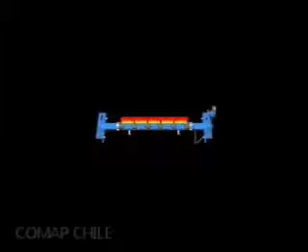Our products are patented in more than 20 countries, and their success is based on sound engineering principles. The DirtWhacker primary and secondary belt cleaner systems provide solutions to many of the problems that have plagued the industry for a long time.

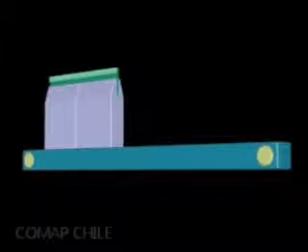A widespread problem experienced by the bulk handling industry is the effective adjustment of the conventional scraper. The conventional scraper is mounted on a solid carrier, which in turn is kept in place with mounting brackets. To compensate for wear on the scraper blades, the solid carrier needs to be adjusted towards the belt.

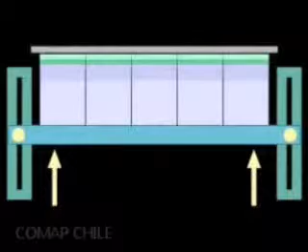This operation requires skilled labor, as incorrect adjustment can cause accelerated top cover wear or excessive spillage. Incorrect adjustment leads to accelerated belt wear and excessive spillage.

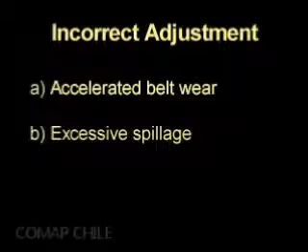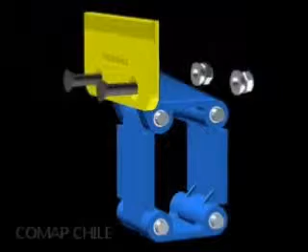The DirtWhacker belt cleaner blades are individually mounted on a parallelogram, which in turn is mounted on a main frame. The main frame's position is determined during the initial installation, and there is no need for further adjustment to the main frame.

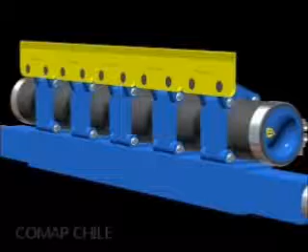To compensate for wear on the cleaner blades, the DirtWhacker makes use of a single air bladder that services all parallelograms on a given belt cleaner. As the air bladder is pressurized, it exerts force on the inner walls of the parallelogram, thereby providing a precise controllable belt-to-blade pressure.

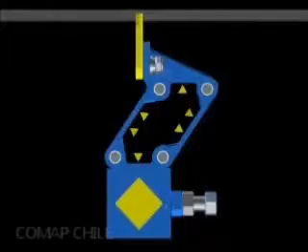From a convenient location, the pressure in the air bladder can be monitored and maintained as blade wear occurs. No skilled labor is required to maintain optimal belt cleaning with the DirtWhacker.

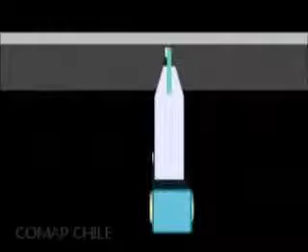Blade angle of the conventional scraper. Maintaining the correct blade-to-belt angle is imperative if excessive spillage is to be avoided. The conventional scraper blade arrangement is susceptible to friction that occurs between the conveyor belt and the blade.

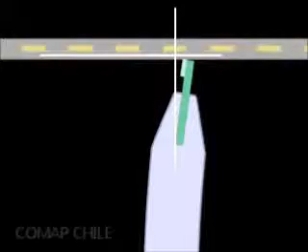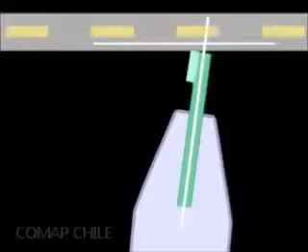The belt-to-blade friction forces the blade into a negative belt-to-blade angle. The kinetic energy inherent in the velocity of the material forces the scraper blade further into a negative angle. A negative belt-to-blade angle acts as a conduit, and material is forced past the blade.

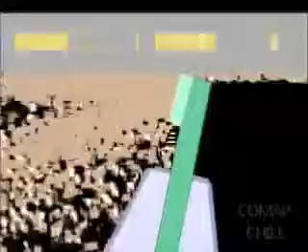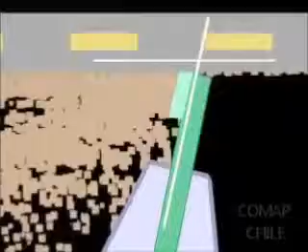To reduce the spillage that is occurring, the conventional scraper unit is readjusted towards the conveyor belt. When the material is removed, the conventional scraper blade will be forced into the top cover of the conveyor belt. Thus, accelerated top cover wear will occur.

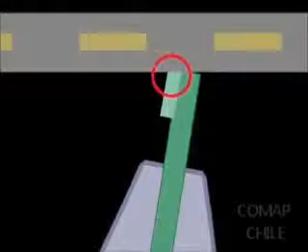Incorrect blade-to-belt angle leads to excessive spillage and belt top cover wear.

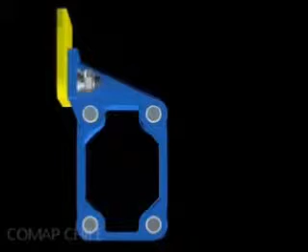The DirtWhacker principle of operation is based on a parallelogram. The durable construction of the parallelogram ensures that the belt-to-blade angle, determined during installation, will be maintained throughout the life of the blade.

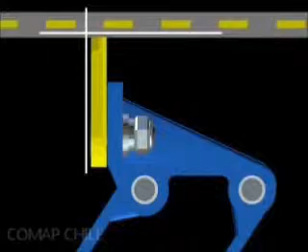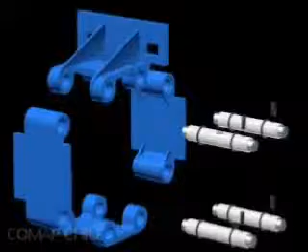The construction of the DirtWhacker parallelogram ensures an extended service life. The nylon-coated hinge pins are sealed off from the harsh operating environment with O-rings. This construction facilitates trouble-free maintenance, and the blade-to-belt angle, as determined during installation, will be maintained throughout the life of the blade.

Blade wear of the conventional scraper. Due to the loading pattern on conveyor belts, the abrasive material tends to settle towards the middle of the belt.

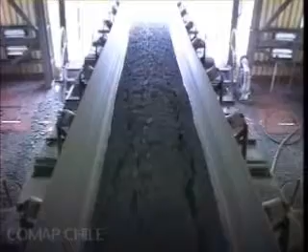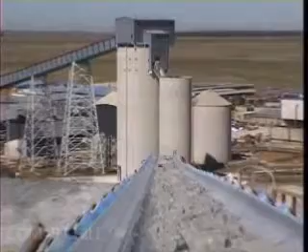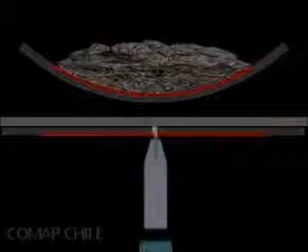Over a period of time, the impact of the bulk material causes an array of indents on the top cover of the conveyor belt. The location of the indents reflects the loading pattern. These indents act as receptacles for the abrasive carryover material.

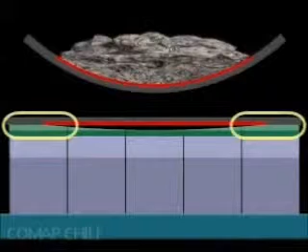Accelerated wear occurs as the carryover material passes over the conventional scraper blade. As abrasive material settles towards the middle of the belt, the scraper wear will be a mirror image of the loading pattern. When the conventional scraper assembly is adjusted to compensate for wear in the middle section,

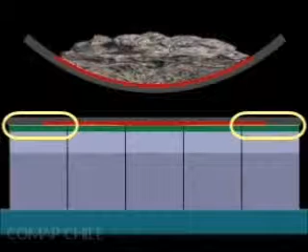the outer sections of the conveyor belt will be overpressurized. This results in accelerated top cover wear. Carryover leads to accelerated blade wear and belt top cover wear.

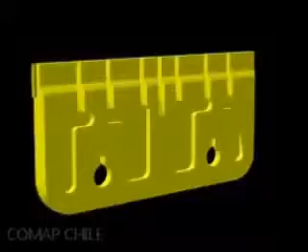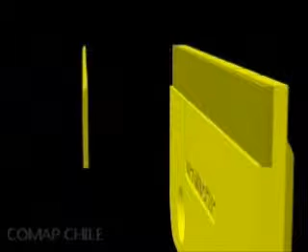The DirtWhacker blade system is engineered to significantly reduce blade and conveyor belt top cover wear. The thermal grooves minimize thermal stress on the blade and hard metal insert. The soft metal insert protects the hard metal insert from mechanical and thermal shock.

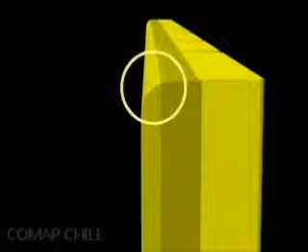DirtWhacker blades provide a wear life of 15 mm hard metal. Utilizing a rounded leading edge, the DirtWhacker blade system can be applied to the conveyor belt at a greater force than the conventional scraper, making use of the inherent flexible properties of the conveyor belt.

All materials, including those lodged in the indents of the top cover, will be squeezed out of the belt, and a clean belt will then be conveyed over the hard metal insert of the DirtWhacker blade.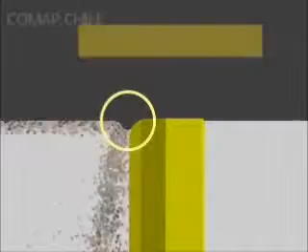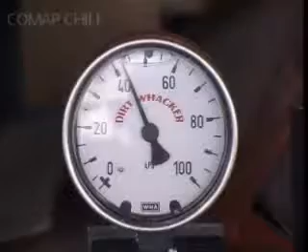If the indents into the top cover are 20 micron or less, and the correct belt-to-blade pressure is maintained, the wear on the hard metal of the blade will depend only on the conveyor belt speed and the presence of mechanical fasteners, and not on the abrasiveness of the transported material.

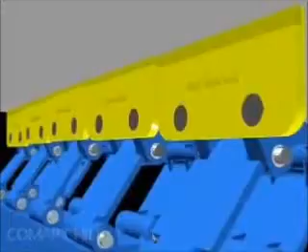Each parallelogram unit compensates for blade wear. As a single air bladder supports all parallelogram units on a given scraper, the belt-to-blade pressure of all the individual blades remains equal in spite of wear.

Each parallelogram unit is able to respond speedily to load-varying conditions. The DirtWhacker blade system does away with carryover. The single air bladder ensures uniform belt-to-blade pressure.

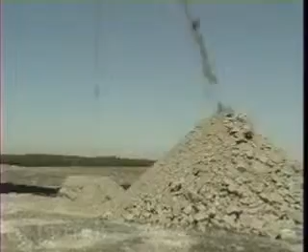No skilled labor is needed to keep the DirtWhacker functioning optimally. Only the air bladder pressure needs to be maintained as determined during the initial commissioning of the DirtWhacker cleaner.

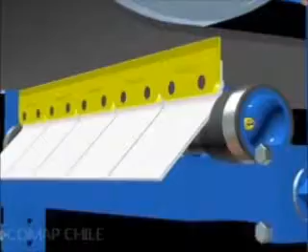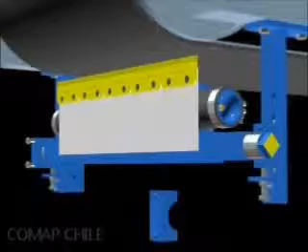Blade height must be verified at regular intervals. The abrasiveness of the bulk material will determine this interval. Replacing the blades is a cost-effective operation of removing the unit by undoing 4 bolts. By making use of the blade alignment tool, the blades are aligned with ease.

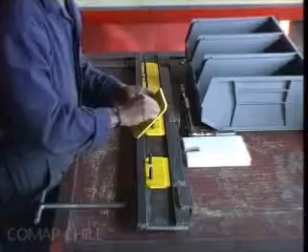Installation of the DirtWhacker belt cleaner is explained on the DirtWhacker CD-ROM by means of video and printable material.

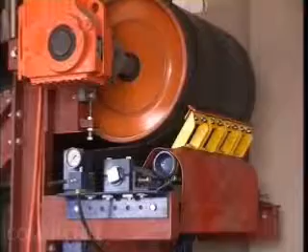As the belt-to-blade force of the DirtWhacker primary and secondary cleaners is controlled by air pressure, the DirtWhacker belt cleaner units can be remotely monitored and activated as needed.

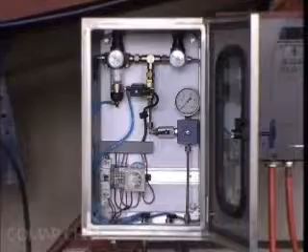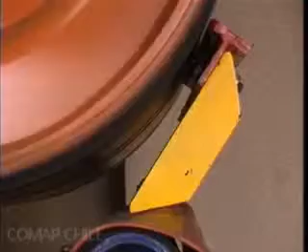The DirtWhacker control units allow for the seamless integration of the DirtWhacker cleaners with the conveyor plant PLC system. As a result, the activation and full or partial deactivation of the DirtWhacker cleaners can be fully automated.

This feature allows for problem-free operation on fast, dry-running belts. Belt top cover wear is significantly reduced if the belt cleaner is not active when the conveyor belt is running dry.

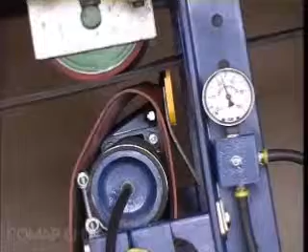The DirtWhacker cleaners can accommodate reversible conveyor belts. The DirtWhacker primary and secondary cleaners function well on most mechanically joined belts.

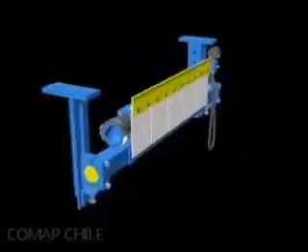The DirtWhacker product range is successfully deployed on conveyor belts with speeds of up to 6.7 meters per second. The unique technology of the DirtWhacker makes efficient belt cleaning available to the industry, with conveyor belts of up to 4 meters wide.

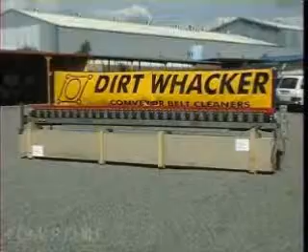DirtWhacker, the company committed to conveyor belt cleaning. A company committed to service excellence in the bulk materials handling industry.